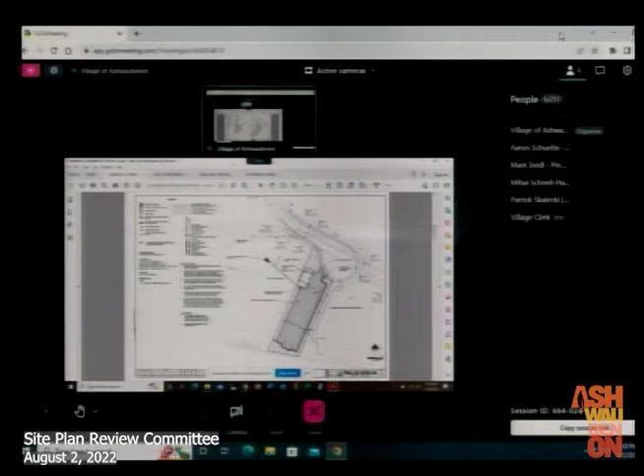In terms of additional conditions of approval, pretty minor. Extend the standard 18-inch curb and gutter to include the northwestern driveway apron. Revise the notes to identify only the L-shaped soil pile that is the village's responsibility to remove. On the documents, it does identify some soils that goes back to the amended and restated development agreement the village has with the developer to remove a soil pile. The village's soil pile actually is going to start being removed tomorrow, so that'll be taken care of and is in the works. I just want to make sure that it's clear on the documents which soil pile the village is actually responsible for.

A couple additional ones here. Screen any new rooftop or ground-mounted mechanical units visible from the property boundaries or public right-of-way. ADA parking stalls may need to be added by the office building when taking into account the added number of stalls of this lot. And then the catch-all, meet all applicable requirements of the Ashwaubenon site plan review and all other applicable village ordinances. Those were all the recommended conditions of approval. If you have any questions, I'm happy to answer them.

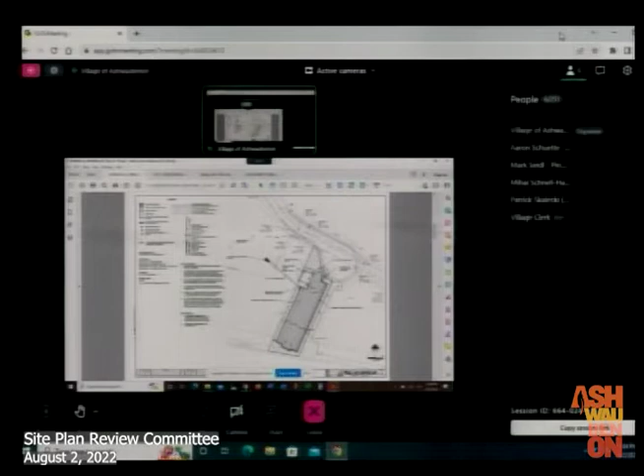Any questions from anybody? Aaron, that butts right up to the existing parking lot to the apartment there, it looks like. Correct. You can see right here, this is Manso Flats parking lot, and this is the new parking lot. A certified survey map is going to be reviewed by Plan Commission tomorrow, creating this parcel. And I heard you say that that dirt pile is going to be removed, starting tomorrow. Correct, the village's pile.

6B, action regarding requested site plan review for American Custom Metal Fabrication Building and Parking Lot Addition, 2612 South Broadway, parcel VA-160-1-1-A. Aaron? American Custom Metal Fabrication, or ACMF, is adding, there's two additions actually.

One is 52,183 square feet, that's this one right here. And there's a small 2,400 square foot addition on the north side right here. In addition to the two additions, the parking lot is going to be added to in the back here, as well as some loading dock areas.

A wet stormwater retention pond will be located in the northwestern corner here. They are still working with Steve Burr on the details of that stormwater pond, as far as its sizing and overall details.

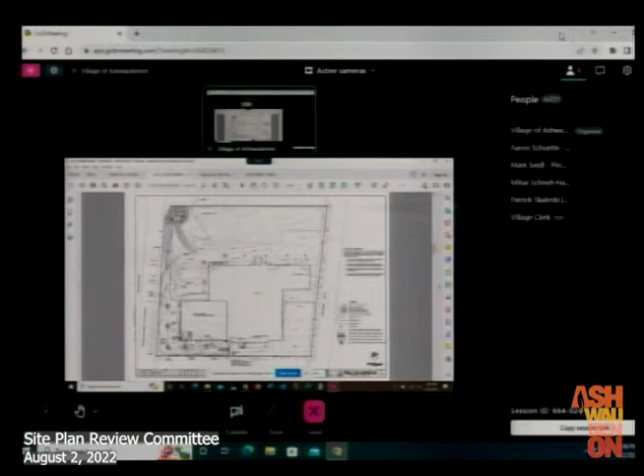In terms of exterior materials, I'll get to that page here. You can see the elevations. There is the minimum 3-foot masonry wainscot. I believe they're actually talking about a 6 or 8 foot concrete masonry CMU unit wainscot.

They are using semi-concealed fasteners for the wall panels, as is permissible under the amendment approved a few months ago for additions to industrial buildings on non-street facing elevations within the I-2 zoning district. So this does meet the criteria for allowing semi-concealed fasteners in this instance.

Overhead garage doors, you can see here, were added on the west elevation for product receiving.

In terms of recommended staff conditions: screen any new or larger replacement rooftop or ground-mounted mechanical units visible from the property boundaries or public right-of-way. And the catch-all, meet all applicable requirements of the Ashwaubenon site plan review and all other applicable village ordinances.

From stormwater, I mentioned the continuing coordination with engineering on the sizing of that stormwater pond. From forestry, they didn't have a condition, but they do have a recommendation for the owner and development team's interest - a recommendation to add shade trees along South Broadway. That's a recommendation from forestry to the owner; it's at their discretion to follow through on or not.

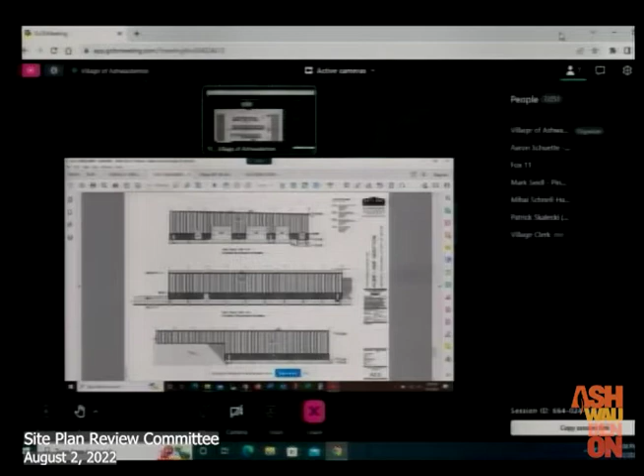So it's definitely an improvement on that property with the parking lot being asphalt. I kind of know the property a little bit. Everything else matches up to the ordinances you mentioned, Aaron, with our building codes.

The only question I have - if you look at sheet 4, proposed additions, there's a small one on the front there. What is that, a loading dock or what? Let me just find that here.

Nobody else wants to speak, so I'll make a motion to approve the project with staff conditions. Okay, we have a motion and a second to approve with staff conditions.

If you could picture where the Mount Calvary Cemetery is on West Main, this is the vacant lot just to the west of that, before you get to South Ridge Road - typically a sunflower field in past years. It was owned by the guy with the big building at one time, correct? Correct, yes, Christopher Knight. Yep, that's right.

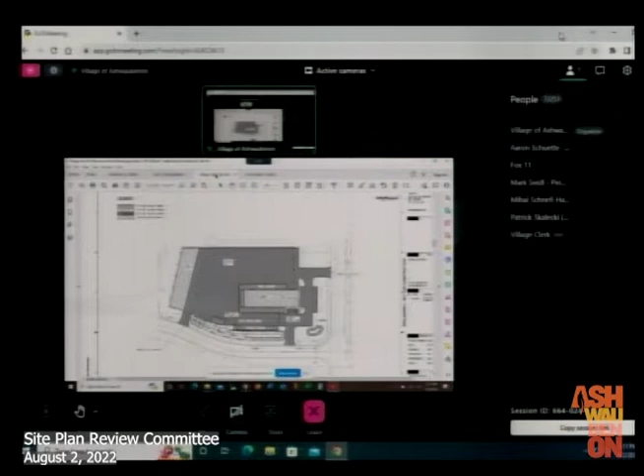So proposed is Sunbelt Rentals, which is a permitted use - heavy equipment machinery rental and sales - within the I-2 heavy industry zoning district, which is what this is zoned. All of the dimensional standards of the I-2 zoning district would also be met with the proposed plan.

Exterior materials - well, I'll just go through the site plan here. What you see here is the building. There'll be offices up front with bays in the rear for equipment maintenance, cleaning, and so on. Outdoor equipment storage is in the fenced area you see here. The dark area is asphalt, this is some concrete paving areas, and this actually is a gravel pad to the rear.

Please note that within the I-2 heavy industry zoning district, gravel is a permitted surface type in those rear areas as long as it is maintained - so it can't get all rutted up or filled with water. You also see stormwater management along South Ridge at both of these locations here. Those are biofilters, so typically they are dry; they will fill with water when wet and then percolate through and drain out.

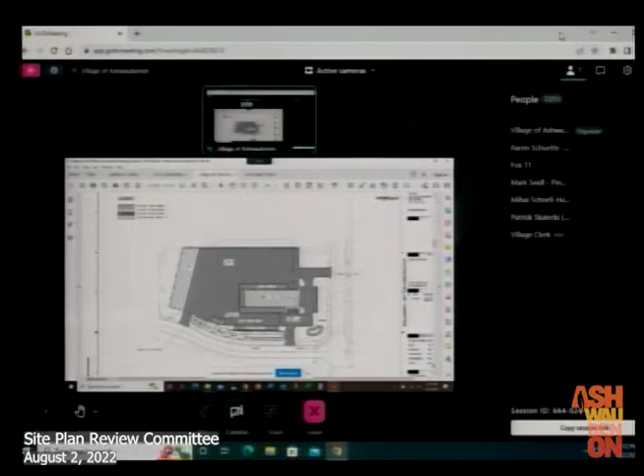In terms of exterior materials, I'll get to that here.

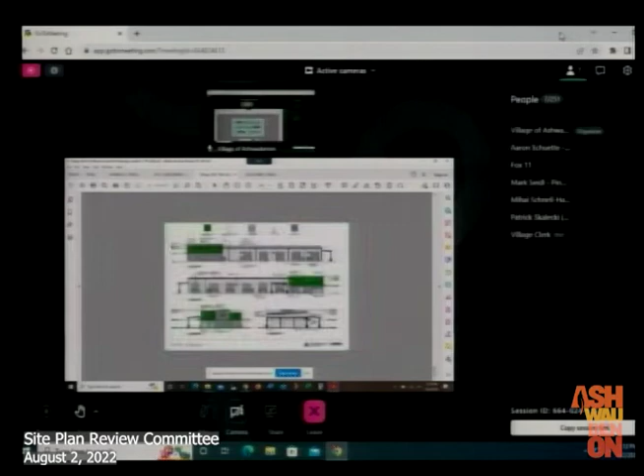You can see it is a metal wall panel building with concrete or CMU in front. We do require a minimum 3-foot masonry wainscot on new metal panel buildings to protect the finish from damage, per our code.

No rooftop mechanicals are depicted, but it's important to note that if there are any new rooftop mechanicals visible from the public right-of-way or property lines, they do need to be screened according to our code.

Due to the change in grade on this property, there will be a cast-in-place concrete retaining wall against the cemetery property. There's about an 18-foot drop in grade from the cemetery to South Ridge Road, so there's some work to do there in terms of landscaping.

I mentioned the stormwater management through the biofilters per village engineering. A maintenance agreement will need to be submitted to village engineering for review and approval.

In terms of recommended conditions of approval: minimum 3-foot masonry wainscot from finished grade for all exterior metal wall panels, use of fully concealed fasteners for exterior wall panels, and all new off-street parking, asphalt or concrete surfaces, driveways, and internal landscape islands shall have a perimeter concrete curb and gutter. That would not, of course, apply to the gravel area.

Screen any new or larger replacement rooftop or ground-mounted mechanical units, and meet all applicable requirements of the Ashwaubenon site plan review and all other applicable village ordinances.

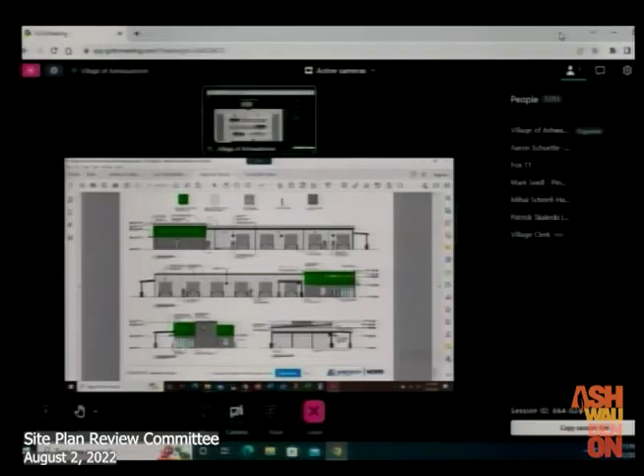Is the question just if the one in Lawrence—is there one in Lawrence going in addition to this? Is that the question? Did I hear it right? Yes, that's the one off the highway by Folt and all those buildings. Is that one being moved, or are you just building another one here?

I don't have the answer to that question. I'm not aware of them changing or relocating to this location. The developer would have to provide that information. They haven't shared that or any intent to get rid of that site with us. But again, we're focusing on this site. We weren't involved in any decisions on the corporate side—let's put it that way. Okay, I don't know the short answer.

Just curious. Aaron, on this drawing you were talking about the 3-foot wainscot—am I missing something? Nope, that's one of the conditions of approval, to add the 3-foot masonry wainscot. Well, to further his question, east, west, north—I see paneling running all the way down to the ground. Right, that was during the review; it was noted that there is no 3-foot masonry wainscot, and that is a condition of approval, that when it's constructed, they do have to have the 3-foot masonry wainscot. They have to, yes. Okay, as long as that's clarified.

That was my question too. Okay. For future reference, if it was shown on the diagram, I probably wouldn't include it in the conditions.

Okay, any other questions? I make a motion to approve. Second? Okay, we have a motion and a second to approve. Is that with staff conditions? Yes. Okay, motion and a second to approve with staff conditions. All those in favor say aye. Aye. Opposed? Motion carried.

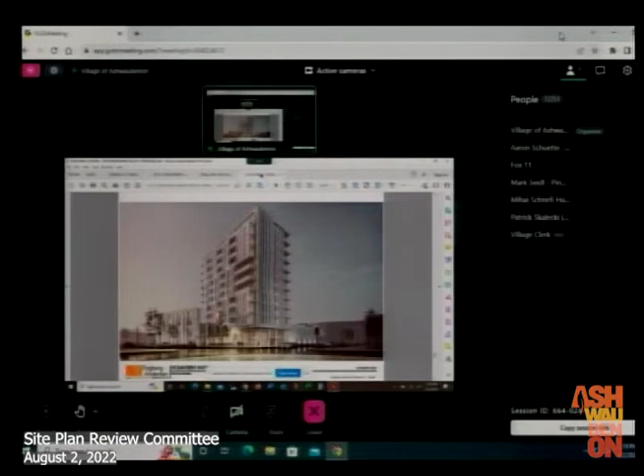The property is currently vacant and used for parking for the bar. It is zoned SE, Sports Entertainment, and this type of development with a mixed-use development on the first floor and residential above is a permitted use within the SE Sports Entertainment zoning district. In terms of the height, they have received approval from the FAA for the height, as well as an approved conditional use permit up to 140 feet from the village board.

Exterior materials will consist of a mixture of glass wall systems, concealed fastener wall panels, and extruded porcelain, open jointed rain screen system cladding with lattice accents. And I'll let the experts speak to that a little bit in here just in a little bit.

There will be 3 levels of indoor parking totaling 164 stalls, so well beyond our typical standards you see for parking. Additional amenities in the condo include a fitness room, common room, theater room, tenant storage, dog spa, and conference room. Visitor bicycle racks will be located outside the ground floor on the Holmgren Way elevation and on the Mike McCarthy Way elevation for the commercial uses. The secure bicycle storage room is located at the northwestern corner of the basement level, and a rooftop wall will screen the rooftop mechanical units. Since this project is within the Sports Entertainment District, Plan Commission and Village Board approval is required as well.

In terms of recommended conditions of approval, work through this a little bit. The address will be 2011 Holmgren Way. Meet all applicable requirements of the Ashwaubenon site plan review and all other applicable village ordinances. From engineering, verify that new sanitary, water and storm laterals are being requested and existing laterals are not being utilized. And coordinate with village engineering regarding any road or lane closures requested during construction. Obviously, lane closures during Packer season is always a tough deal, so we just want to make sure that's taken into account during the construction planning and staging.

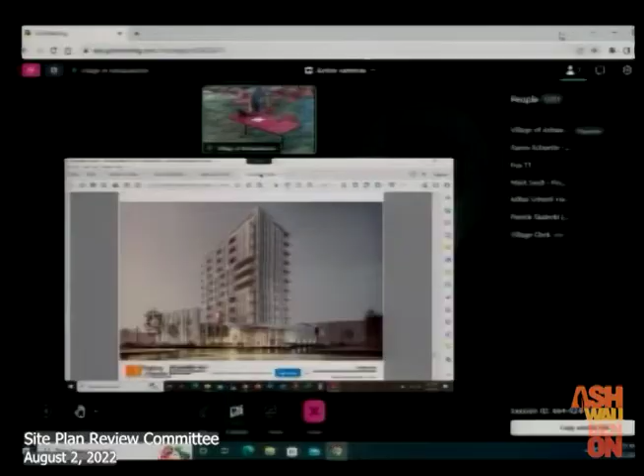So I guess with that, what I'd like to do is hand it off to the development team, let them walk through some of the details of the materials and some of their design thoughts. Feel free to use this to show it up on screen for anyone who's at home.

Hi everyone, I'm Tim Willaz with Engberg Anderson Architects. I'm Mariana Arena. We also have Mark Seidl joining us virtually, he is our civil engineer, so if there's any questions regarding the civil. Good afternoon. Hi, Mark. Are there plans in here? Yes. Okay, so maybe. Bear with me for one moment.

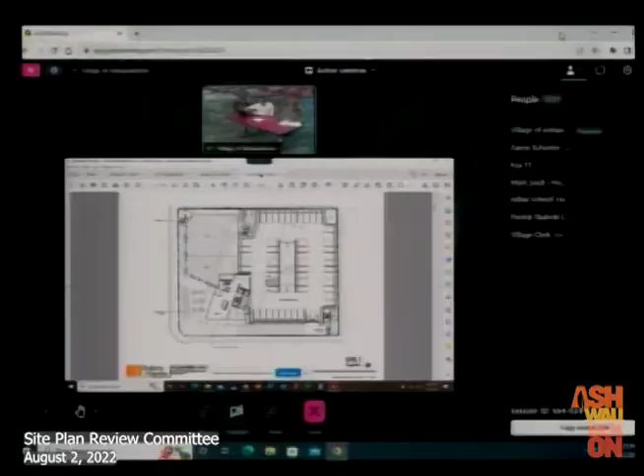So I think maybe where we'll start is just the siting of the building, just to give you guys some understanding of why we sited the building the way we did. It's a little hard to see up there, but the building is effectively pulled away from that corner, and that's to offer a public plaza. The building itself actually skews back at an angle, and that helps us in a couple of ways. That helps us get a longer profile without taking up too much of the block, but it also lends itself to the angles of the sun.

So the swimming pool is located directly to the west of the building profile above, which I'll go to that page in a moment. So the swimming pool is going to get really long looks at the sun in the afternoon and sunset times, which will be very favorable for marketing.

We thought pulling the building away from the corner would help maintain sight lines for traffic. But it also helped us segregate the parking for this building and the commercial use.

Having worked with you guys in the past, we understand the aspirations and ideas you have about activation of the base. So we really wanted to offer a pleasant plaza and commercial retail space that was also marketable for the owner. This effectively helps us occupy more than 50% of the base with very little exposure of the parking to the street side.

On the left-hand side, that larger volume box is the commercial retail, and just to the southeast, that small postage stamp interior space is the residential lobby. The parking is accessed from the south side of the site, and when you come in there's a speed ramp that separates two bays of parking, so you can either go up or go down.

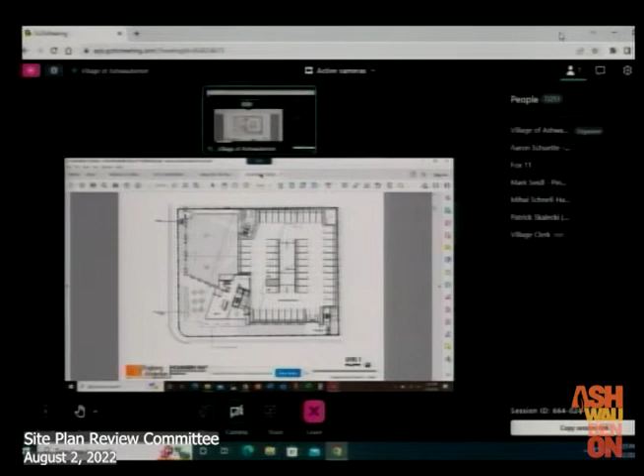If you have any questions at any point, just stop me.

This is our second level. It shows that the lobby will be a double height volume. It also shows, faint on the screen, that the commercial retail volume for about a third of the space on the southwest corner will be double height. On this level we have some small meeting office space and a home theater space.

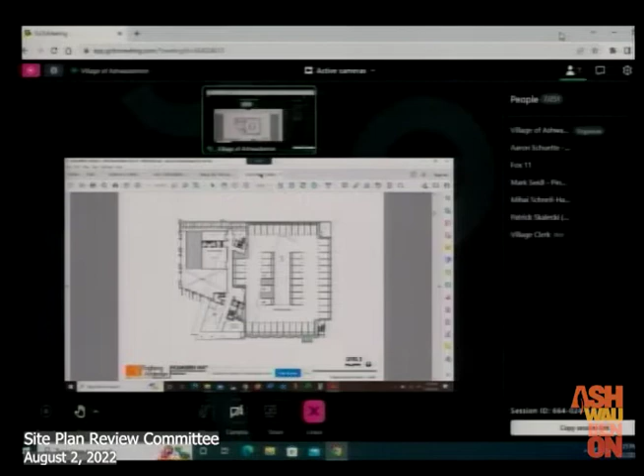This is the third level, and this is the pool area. On the left-hand side along the street we provided an exterior armature of structure, which works twofold — in the rendering it offers a scale height component to make the building feel massed along the street, but also offers privacy for people at the pool. This level would feature the pool, and on the east half potentially a dog walking track, some mini golf putting, and outdoor grilling areas.

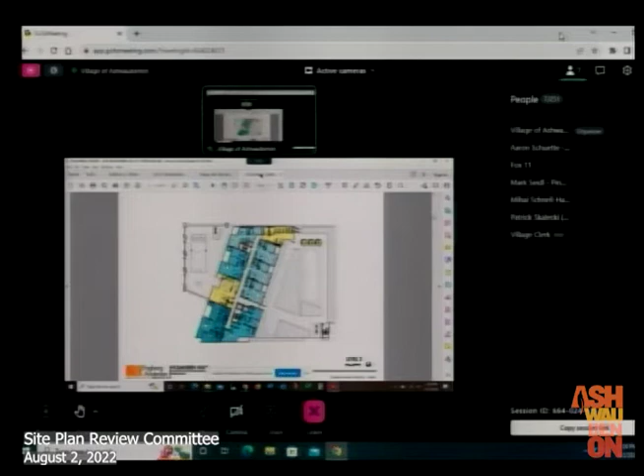Also notable are the yellow areas up against the pool — that's the amenity room and a home library and work area. On the east side of the site, directly accessible to that roof terrace, is the fitness center, so you can imagine having outdoor yoga on that multi-purpose area out there.

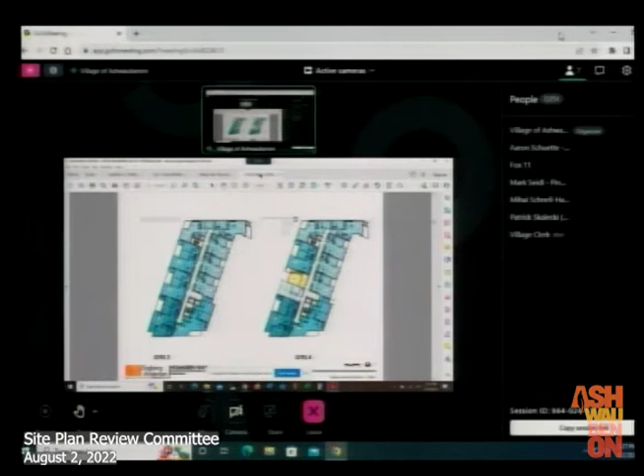I'll say this about the plans — they feature very gracious balconies, wider than usual, and the building is composed so that the glass wraps the balcony corners, so every unit feels like it's got a glass corner unit.

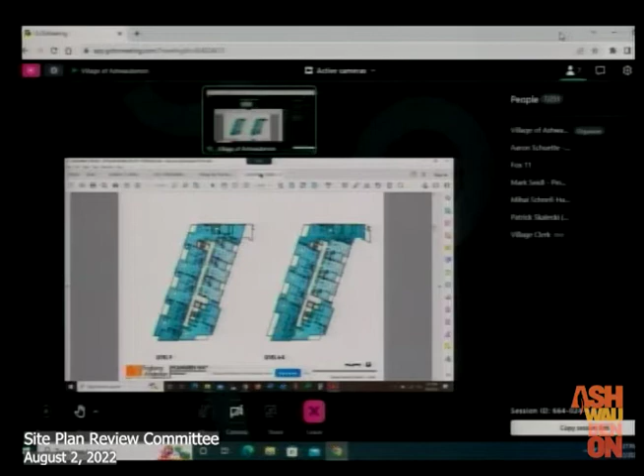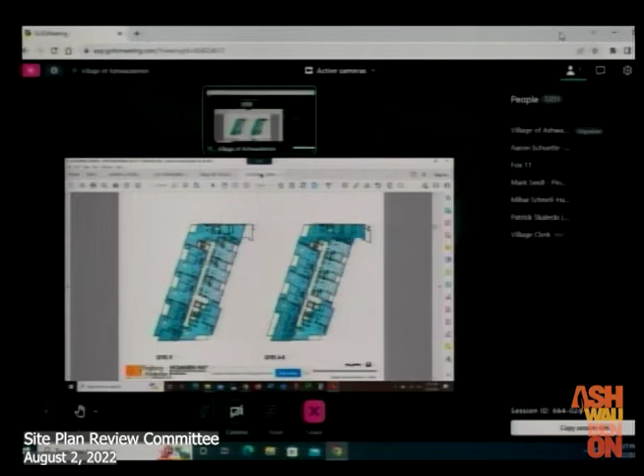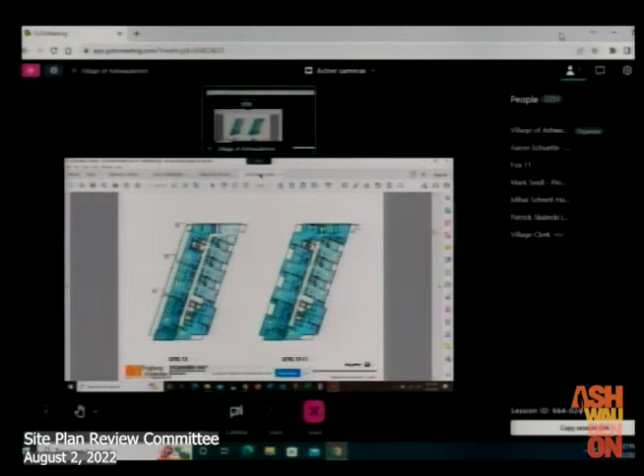A huge amenity for a building like this is its sightlines to Lambeau Field, and we think it's going to capture that sunset over Lambeau Field favorably. On the top floor, on the left-hand side, that white area is actually a full-length terrace along that whole side — those are really the premier units there.

Materially, the exterior is pretty simple. As we said, it's window wall glass, with some metal panel shingling, all concealed fastener. We do have some accent areas, shown in orange on the facade, which we think we're going to do in a low maintenance or no maintenance wood expression.

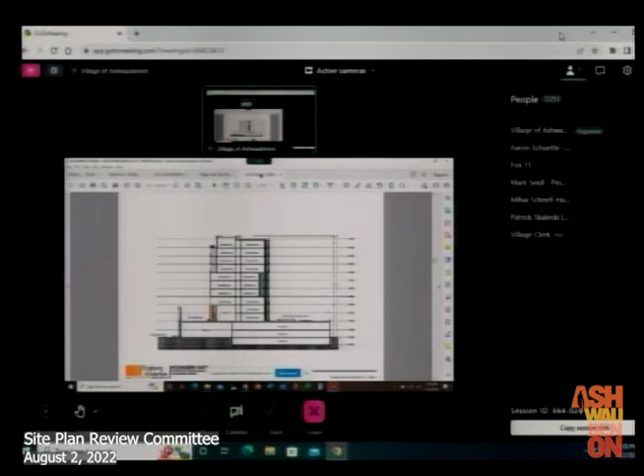The white area is the actual product — I can bring it closer if you guys like. It's a porcelain tile. Last time I came in front of the group, I showed a white terracotta panel, and the inspiration for that was the Bellin office building, that historic white terracotta building in downtown Green Bay. We really liked that white terracotta look, but one issue with modern terracotta is that it's a little brittle and can shatter fairly easily. This product is more robust — it has a higher impact rating, it's lighter, and it may offer more color options.

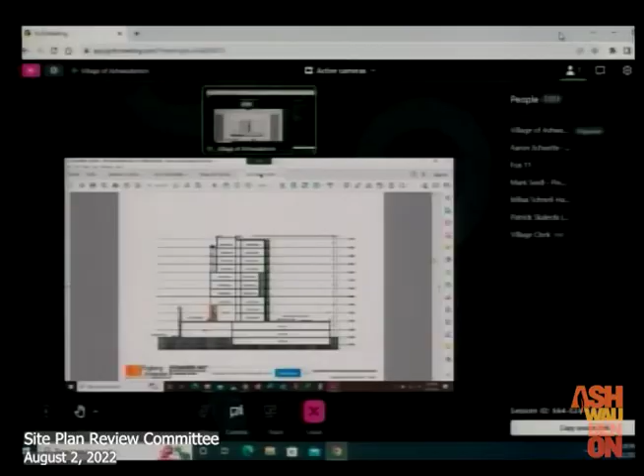What makes up that panel? It's a white porcelain tile. Porcelain tile? Yeah. Okay, nothing to do with concrete? No, nothing like that. Okay. Would you want me to bring it up there? And that's the thickness of it then? Yep, that's just a sample of it.

Thank you. What do you think, boss?

Have you guys used any of that material in this area? We have not. I'm just curious what it'll do for freeze-thaw cycle, stuff like that. Yeah, it's supposed to be better because it's not absorbing water the way terracotta does. Yep, terracotta moves around a lot.

This is supposed to be really stable. What type of warranty do they give you on stuff like that? I think this one is a 20-year warranty, and this product, even though we haven't used it here, it's been used in Europe quite a bit, and it's actually migrating its way to America now. So I think there are examples of this. If you guys need me to drum up info from the rep, I can probably get examples from some bigger municipalities where they've built this product in the States.

So is that 20-year warranty, Karen, based on how it's been used already, or like what Chris said, could this climate shorten the life expectancy? I don't think so at all. I think it's just a boilerplate warranty, because a product like this is really a 100-year product the way terracotta is.

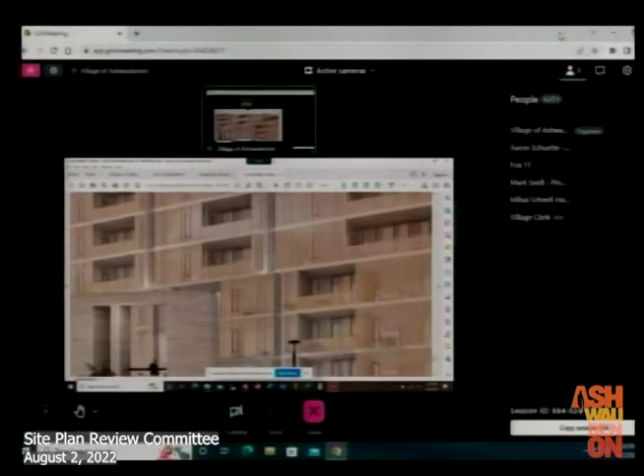It's hard to see here unless I zoom in again. Oh my gosh, it's working. So you can see the modularity of the facades there. It's got the masonry expressed in a smaller module. We didn't want to just do big expanses that were kind of foreign to everything we see around here.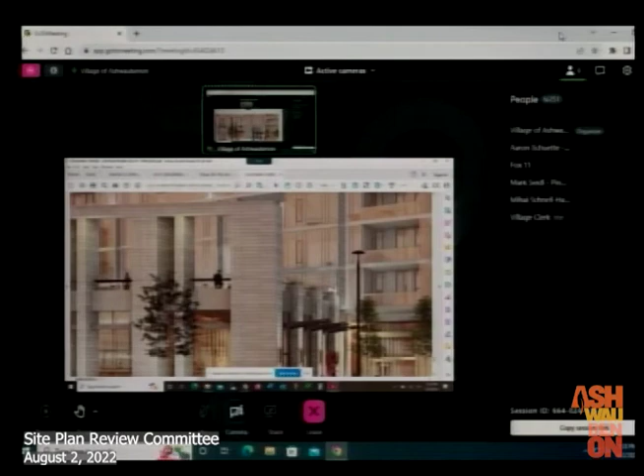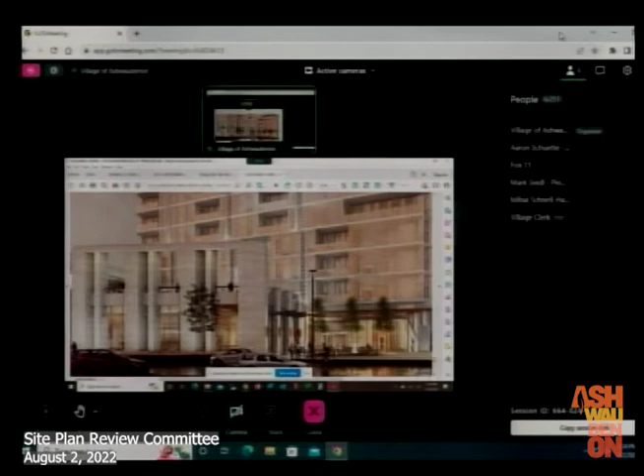We wanted to do something elongated that kind of replicated masonry in that way. So everything that's white on this building is intended to be this product. I think we're showing an off-white with some field variance, but we're also thinking of adding a second color that randomly mixes in, to give it a real field tone and not just a stark white, clean building.

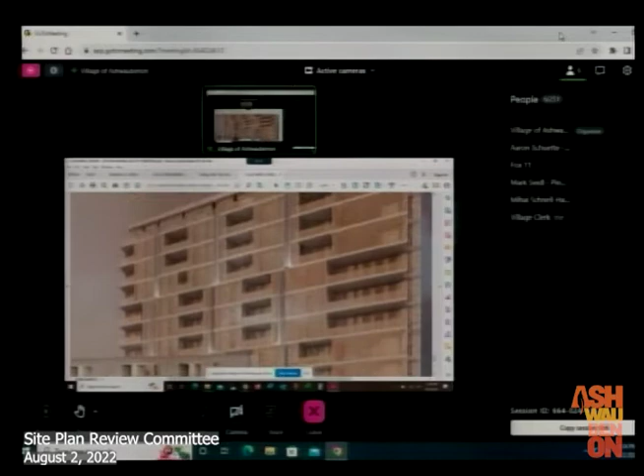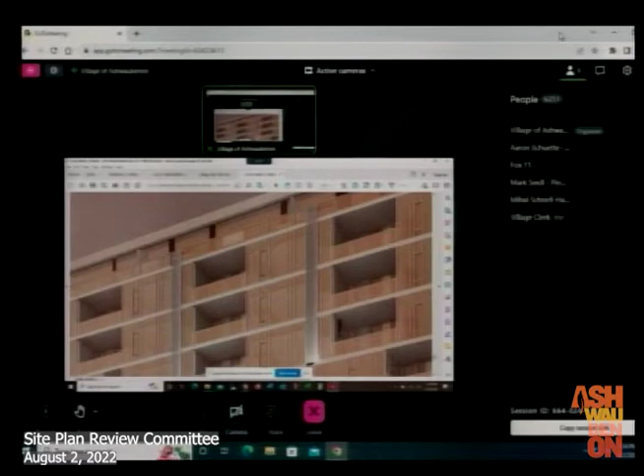Maybe another detail to note along here are these screening elements you see, they're not always really prevalent on the renderings unless you're looking really closely. Those are essentially the same material, but it's actually a sun louver. The restroom is behind it, so we're trying to create some depth to the facade as well as some visual interest with texture.

So is a lot of your material the porcelain too? Is it all porcelain? Let me see. Yeah, it says porcelain on it, I was just curious. It's similar, and a different color as well.

Yep, and the square portions, that's a terracotta baguette. That's not what we're actually proposing with this new panel. They would be more like fins or blades, oriented like you would typically see with a sun louver.

Call that a rain screen, open joint. Rain screen is pretty typical these days. I'm assuming this system is similar to other rain screens where you're air gapping behind it, so all the moisture sheds. By doing that, if you're trying to really seal a building up, it's usually not visually appealing. So putting panels over the top allows you to seal the building up, protect it, and still give it a decorative facade. It's very common - rain shield has been behind brick for a few years. If you're going to brick or stone something, you'd want to see that back there.